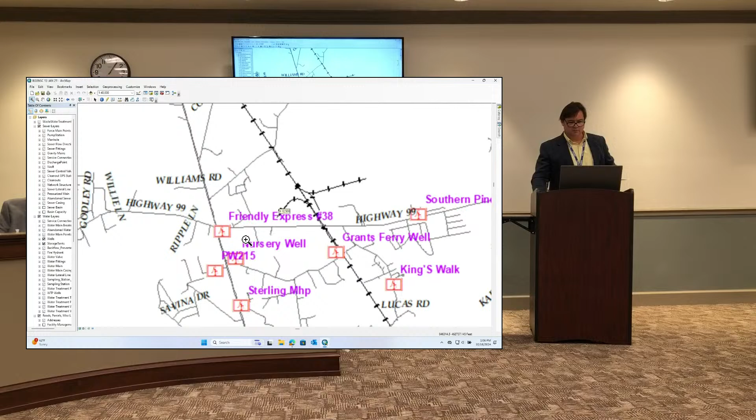As you can see, that water line jumps out of the State Route 99 right-of-way onto their property, goes across their property, then comes back out. That was to help us get around some existing utilities and also help speed along the installation process. Fun fact: Seaboard Construction was also our contractor that installed the water line for that.

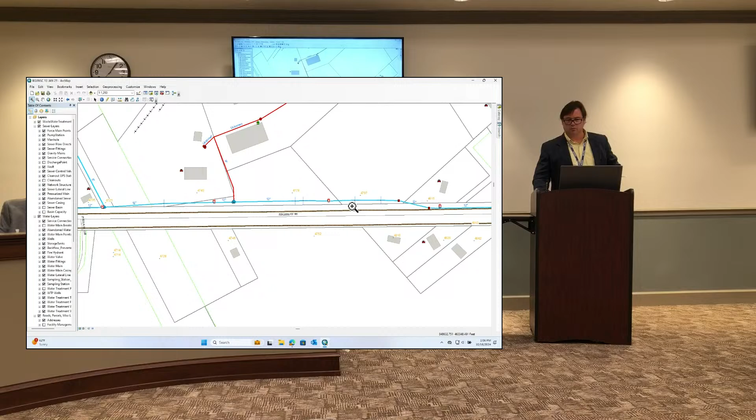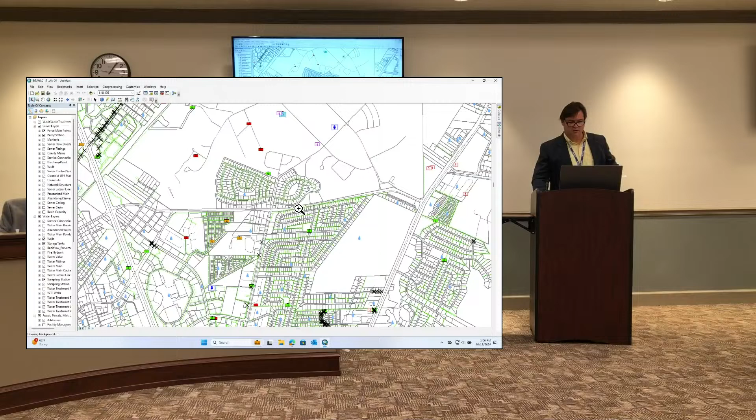Now let's take a look at Town Square, Chapel Crossing Road, over here just south of FLETC. FLETC's easy to see because it's the big blank spot. So Town Square Phase 1 is what we're talking about here, and that's these residential units, and this will round out the easements and dedications for the Town Square development.

It is Phase 1, but they've already dedicated Phase 2 and 3, correct? That's correct, yes. They got their phasing numbers out of whack a little bit, but this will be the last of the phases. This phase is right by the road, right? This is the townhouses, correct, that are running along there. That's correct, yes sir.

I'm happy to answer any questions if there's anything in particular about these two items.

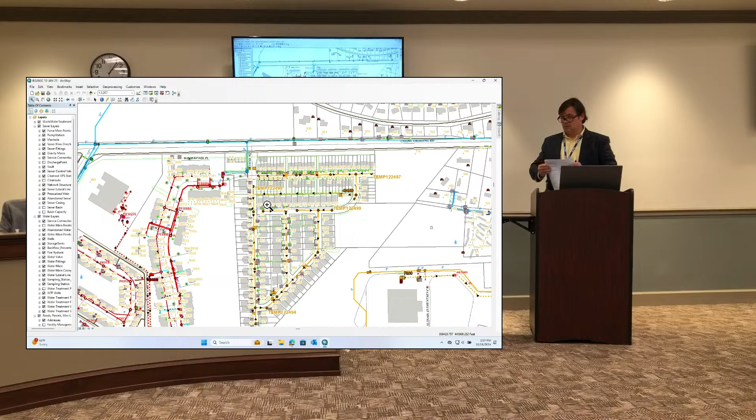Have a motion? I move that the Facilities Committee recommend the full commission approve and accept these projects with associated documentation. I'll second the motion. Motion second. Any questions? Hearing none, all in favor? Motion carries 3-0. Thank you. Thank you, Commissioners.

Go to the discussion section of the meeting. First item is lead service line inventory dashboard.

Mr. Burrows? Yes sir. This is probably the most noteworthy thing that's happened in our industry this week—everybody's lead service line inventory is due today. Ours was submitted earlier this week, so we're on schedule.

According to EPA regulations, we are required to identify the materials of service, both on our side and the customer side of the meter, for water only. There are multiple categories, but essentially we'll talk about 3 of them today: lead, known not lead, and unknown. There's also another category for galvanized requiring replacement.

However, to our knowledge, we will have none of those in our system. The galvanized requiring replacement are any galvanized service lines that are downstream of lead mains. We have zero lead mains in our system, so we don't have any galvanized requiring replacement.

So essentially what we have is 2 classifications. There's a 3rd classification which we don't have any identified at this point. We have known not lead, and unknown.

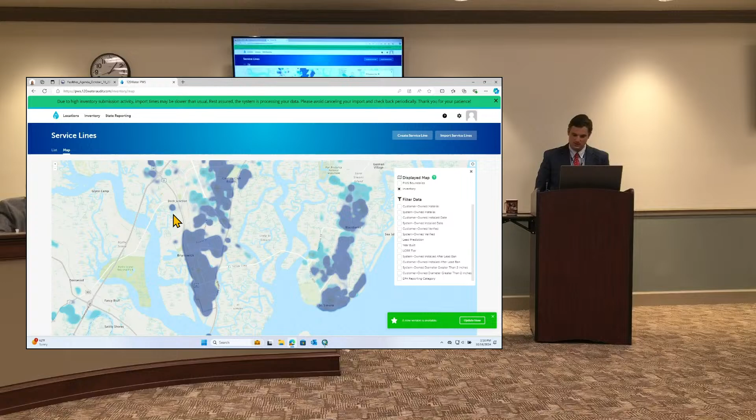So the dark blues that we have here are unknowns at this time, and we have a few things we're required to do. We are required to notify new customers of what their material of construction is when they come in and sign up with us. We won't necessarily tell you that it's PVC, but we'll tell you whether it's not lead or unknown.

We'll have to send out letters within the next 30 days, so theoretically maybe the first week in November or so, we'll send out letters to everybody. Every customer will get a letter identifying what their service is, either unknown or known not lead.

And I say that because we have no knowledge of any lead service lines in our system, but we don't have records on what everything is. So until we can officially eliminate all of them, we cannot say they're not lead.

But our water distribution crews, Derek and Alvin, have been here. Derek's been here 20 years. Alvin's been here 16 or 17 years, something like that. They have never seen a lead service line in our system, but they obviously haven't laid their hands on 32,000 services. They probably laid their hands on most of them, but they haven't laid their hands on all 32,000.

We have a lot of galvanized lines. We have what are known as lead goosenecks, which are excluded from this if they're shorter than 24 inches. We have a lot of lead goosenecks shorter than 24 inches, and if we expose those, we are required to immediately change that gooseneck out.

And so those will be done heavily with the galvanized project. That's how we're going to do those, because we're going to go in and run a new main and run the new services. Those goosenecks will come out at that time.

Everybody will get a letter in the mail from us, and some people are going to get 2 letters. The reason for that is we have to send one to the customer and one to the owner of the property. For some people that's the same, but they have different names. So one of them the owner may be an LLC, and the customer is Joe Smith. Not knowing all of those things, you may get 2 copies of the same letter.

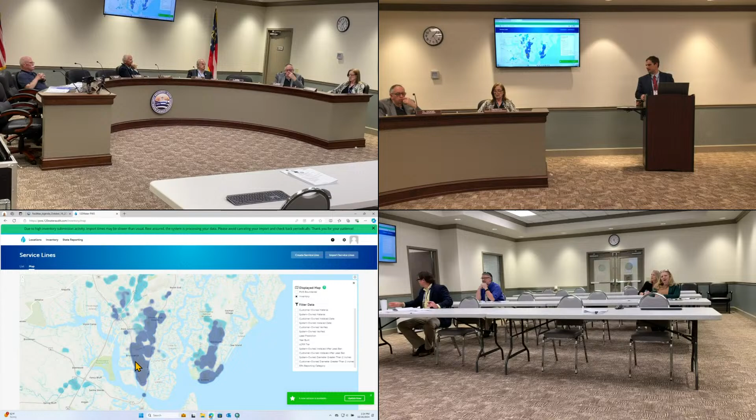You kind of look at this sort of heat map here. Yeah, it's the older stuff in downtown Brunswick, the south end of St. Simons. It's been in the ground for 50 years that we're going to have to go check all these.

I got a question. Can we, when we're at the meter, can we identify the kind of material? You can right there, but that doesn't mean it couldn't have changed past it. Okay, so ground radar won't work? Can't tell material type. Can't confirm material type. They'll have different materials. According to the EPD, you cannot confirm material type that way.

Requirements? Do you know what your line is? That's what we're going to do. On the first letter you're going to get, there's two forms of letter. One of them will say yours is known, not lead, and you have nothing to do. If it says unknown, there'll be a postcard in there that says, do you know the material of your service line? And it will have a few option checkboxes.

We're not going to ask you to dig down. If you want to dig down, then by all means dig down on your own side. We're not going to require anybody to go dig down on anything. Check that box, it's a postcard, postage paid, everything. Send it back to us and we'll input it in the system.

How many responses do you think we'll get back? I think we'll get a few hundred. I don't think we're going to get 17,000. Say 1 to 2%. Yeah, a few hundred maybe.

The purpose, honestly, of doing this in this meeting today is to try to get ahead of some concerns. Just because we send you a note that says you have an unknown line does not mean you have a lead service line. And furthermore, even if you have a lead service line, that does not mean that your water is in any way unsafe to drink. This is just the requirements we're required to follow.

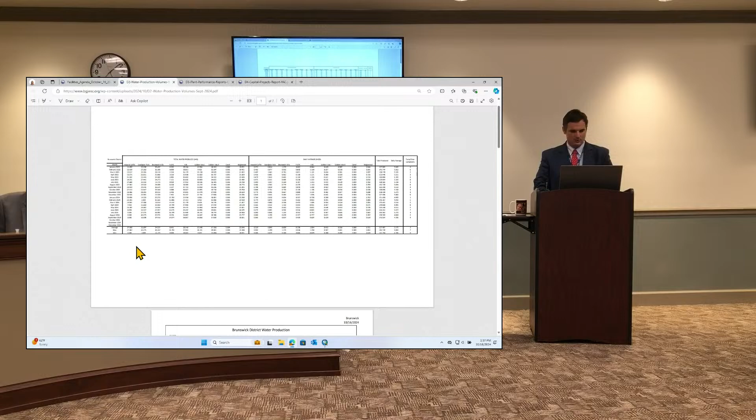The Brunswick system produced 4.8 million gallons a day. Mostly balanced pretty well — you'll see an increased water flow at Goodyear Park as a result of Howard Coffin being down, but overall that's pretty well balanced. It flows a little lower than what we saw last year at this time. Hopefully that's because, through the leak notification or continuous usage notification, we've eliminated some long-standing leaks that were using a lot of water. We still send out a few hundred of those notifications every month, but we're seeing some good results on that. You can kind of see when it was dry in June and early July, water usage went up a little bit. Now we're back down towards the winter averages, as wet as it's been.

On St. Simons, all 4 wells were up and running for the month. Mallory got a little bit of a late start on the month due to some electrical issues, but we had 2.5 million gallons a day of water on St. Simons for the month.

Obviously, these water usage numbers do also reflect water usage during Hurricane Helene. Our water systems were up during Hurricane Helene, but water usage was down because of lack of power and some people leaving and getting out of town. That was just for 5 days or so, but that can have an impact.

You can kind of see again, June when it was really dry, likely outdoor water usage on St. Simons, now it's coming back down. We do see a lot of that, and that trend tends to follow the rainfall events.

And then at exit 29, the wells system's really balanced down there. About 360,000 gallons a day coming out of the exit 29 system between those 2 wells down there.

So water systems continue to be very effective. We've got some ongoing work we're doing to rehab some generators on those well sites, but thankfully we were able to maintain the water systems during the storm, and everybody had water despite the fact that power was out throughout 95% of Glynn County, something in that neighborhood. So good job by our water crews.

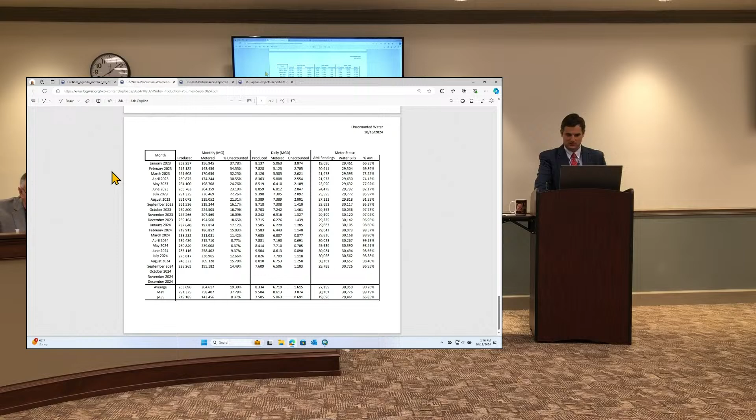Any questions on the water report?

Okay, go on to wastewater. Wastewater reports, Academy Creek for the month, 12.4 million gallons a day, which is down a little bit from August. The first 2 weeks of September were extraordinarily wet, and the numbers did drop back into closer to normal territory by the end of the month.

But we had some heavy rainfall the early part of the month, and still, with the amount of rain we got in August and September, it just takes a long time for those flows to go back down. And you can see right here on these numbers on the influent concentrations, it does have an impact on the strength of the material coming in.

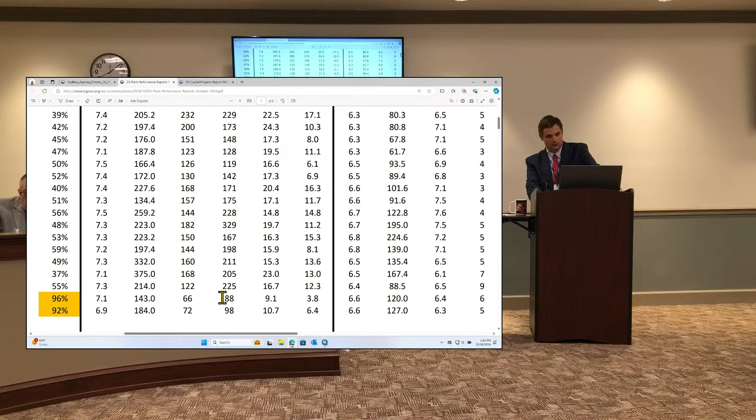BOD at 72 parts coming in, normal domestic wastewater is about 200 to 250 parts per million. So you can kind of get a gauge of how much rainwater is included in those totals to drop it down that far. About 100 parts per million on the TSS. Did get our enterococci under control.

Glad to see the plant take that under control there. Ammonia still having some issues there. We're getting some more RAS pumps online. Hopefully that continues to decrease.

We will begin November 1st cleaning out the grit in Aeration Basin 3, like we did in Aeration Basin 2 earlier this year. The one advantage we have for Aeration Basin 3 is it doesn't have 40 years of grit in it, because the basin hasn't been there for 40 years. So it should be less grit. But it has never been cleaned out, like Aeration Basin 2 had never been cleaned out. So we'll get that process started November 1st.

For the month, 12 inches of rain, following 14 inches of rain in the month of August. So our excessive rainfall certainly looks like October may be a little bit drier for us, which is a welcome sight for our sewer crews. But if you look on our graph on the next page, you can obviously see the rainfall-induced I&I being a major concern that we're going to have to focus on coming up in these next couple of years, try to get these numbers knocked back down where they need to be.

Dunbar Creek for the month, 4.4 million gallons a day leaving the facility. That is a violation, as 4.0 is our permit limit. Those numbers we're back under 4 the last couple of weeks of the month and have been under 4 so far this month, but that is heavily rainfall driven. As you can see, the few months before that were 2.9, 3.2. So obviously we did not add 1 million gallons a day worth of actual sewer flows to our facilities.

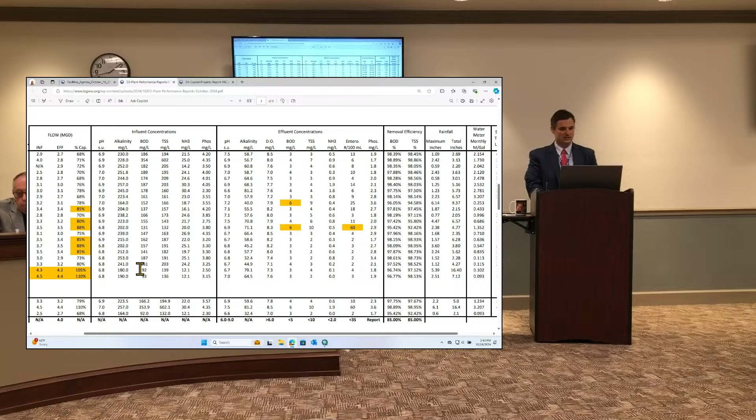It was not 0 ammonia leaving the plant, it was 0.04, but it does round to 0, so that's always a nice number to see on anything leaving the facility. 97% BOD and 98.5% TSS removal, which is really good considering these numbers coming in are not high to start with. If that was up in the 150 to 200 range, you'd be looking at 99% removal on BOD and TSS.

For the month, the rain gauge on the island showed about 7 inches of rain. Rain gauges are as good as they are - it's a point location, you're not getting the full spectrum on that. But obviously still another very wet month, particularly those first couple of weeks of the month on St. Simon's.

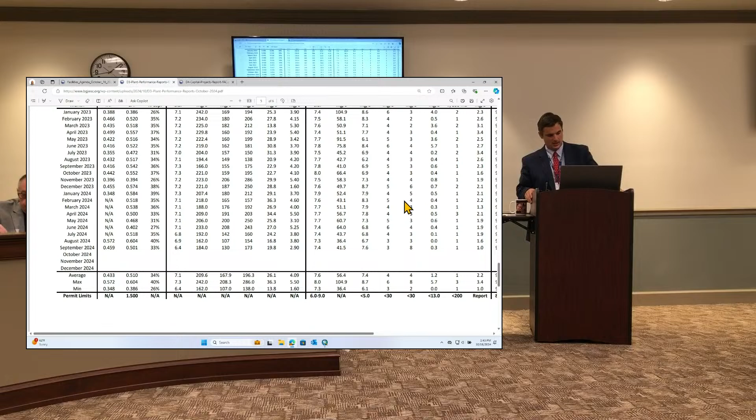Then at exit 29, about 500,000 gallons a day going through. That system being newer has significantly less I&I compared to the other 2 systems. We do get a little bit in there, but not near as bad as the others. So you see the concentrations higher than the other 2 plants on the influent coming in, but 98% removal on BOD and 95% for TSS. Plant ticking along very, very well down there at exit 29.

About 7.5 inches of rain recorded at exit 29 for the month as well - you can kind of see it. Exit 29 flows stay fairly consistent month to month compared to if you look at the graphs on the other ones.

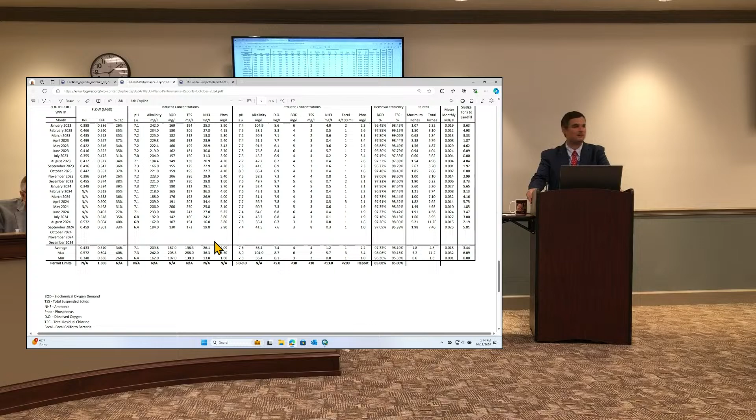Thankfully, we did not receive much rain with Helene. That would have made that situation drastically worse for us if we had gotten a substantial amount of rainfall during that event, given the amount of power outages that we had. But any questions on the wastewater flow report?

Question: the replacing on the north end or south end of Brunswick, is that where most of the water is coming from? We know we have extremely high run times at Pump Station 4002, which is the one that serves the bulk of the south of Gloucester district in Brunswick.

We do have the 5 miles of pipe that are currently under rehab. They're doing some pre-inspection stuff there now - when the project report comes up, we'll go through it in more detail. We know that is a major contributor.

We also have significant I&I issues out around the hospital and out in the Riverside district across 17. We have significant I&I over there in the mainland district, and then on the island, it does appear that a large amount of that I&I is getting into the gravity basin immediately surrounding Dunbar Creek, because we do have some elevated run times at pump stations, but nothing that would indicate the volumes of flow that we should be getting.

So we've got some south end of St. Simon's work to do in the 2002, 2003 basins. Those are large basins on the south end, but it looks like the bulk of that is getting into that gravity basin immediately adjacent to the plant, which makes a certain amount of sense given how low it is back there in Glen Haven in those areas.

And if we get a lot of tidal issues in those situations, we could get a significant amount of water through that plant. We've got 4002 going now, and I got the information sent to me end of last week on the 4017 basin, which is the one that serves the hospital area - haven't had a chance to review it yet. So in the next year or so, you'll probably see several more CIPP projects coming out to try to address this.

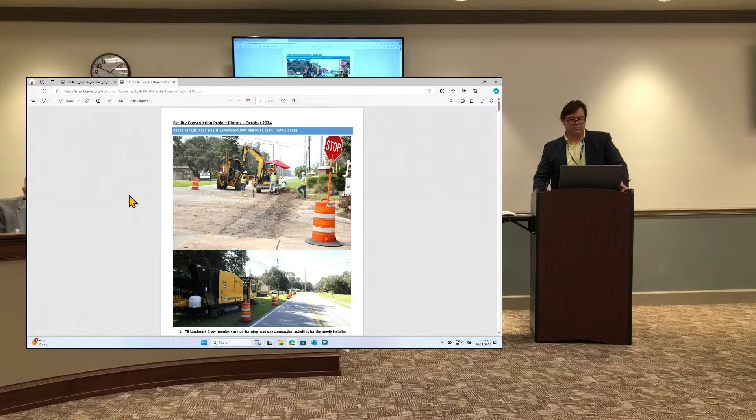Commissioners, here's our construction underway photos, and we'll walk through this pretty quickly. Pump station 4105, 4107 basin improvements, that's primarily a force main extension or improvement project. Going very well. I think they're using the last couple segments of poly pipe at Old Jesup and Cate Road for the carrier pipe that's going to go underneath the railroad tracks, and we're just waiting on the final permitting with the railroad companies, two of them, RailPros, which is their preferred contractor for us to use for flagging once we start drilling underneath the railroad tracks. So going very well. TB Landmark is our contractor for that project.

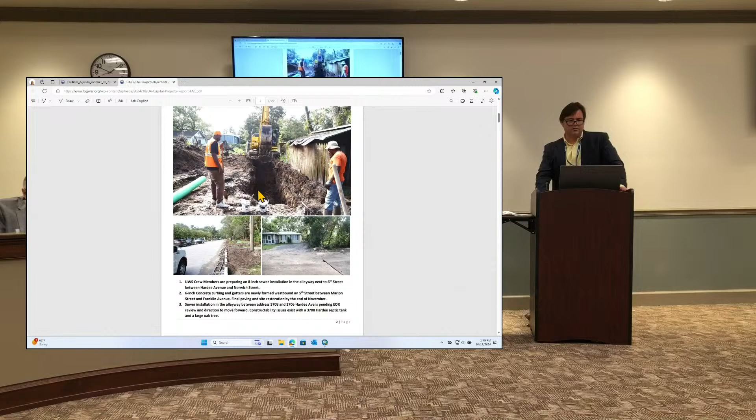Next project is ARCO area water sewer extensions. We're hoping that project wraps up in November with final paving and whatnot. Last bits of the gravity, some pictures here of it going in. This is a good example of one of the unopened alleyways we're utilizing to stay out of the roads. We did relocate some of the originally designed gravity segments in the roadways at the contractor's advisement, using these unopened alleys. I believe the report last Friday was there's about 750 feet of pipe left to install.

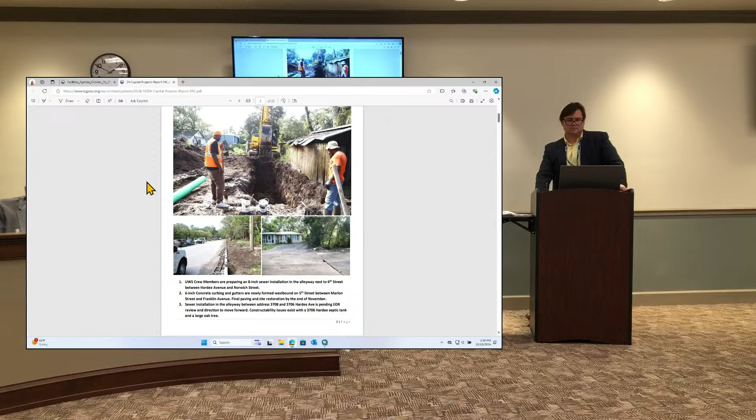It's just testing and site restoration, paving, things like that that's got to be done. That's it. Closing in hopefully very soon on that.

Galvanized replacements, in-house project, just a couple shots here of segments of pipe that have come out of the system. Ms. Annette Corneli, she's in planning construction. Also Mr. Willie Walker, he's in planning construction as well. Showcasing a couple of those pieces right there.

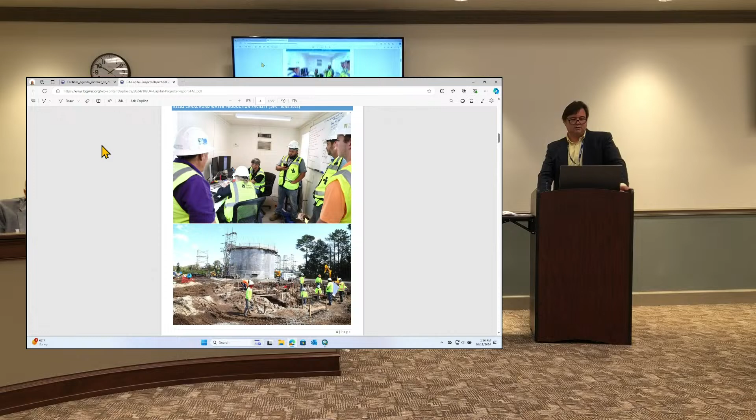Canal Road Water Production Facility. If you haven't been out in that area, I encourage you to go take a look. You'll see the big inside, the inner wall of the tank that's standing out there now. They'll be winding that with pre-stressed wire, then shooting the outer concrete wall on that. Looking pretty good. A lot of site piping all the way underneath the building of the service pumps going in now.

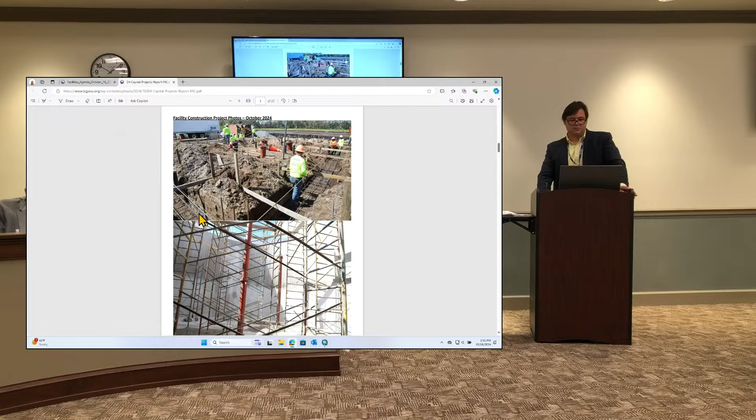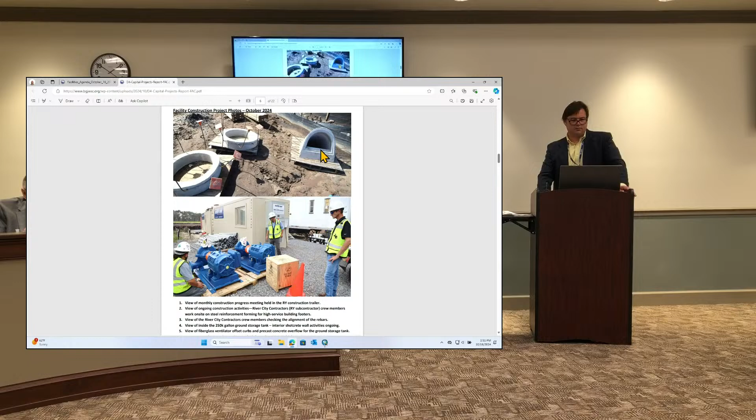That's the inside of a ground storage tank if you've never seen one, before they've shotcreted it. Some of the fixtures they fix on there, the overflow shroud. Two nice heavy-duty Peerless pumps sitting on skids there. Those will go into service, 1500 GPM high service pumps. That's what pumps the water from the ground storage tank to the system.

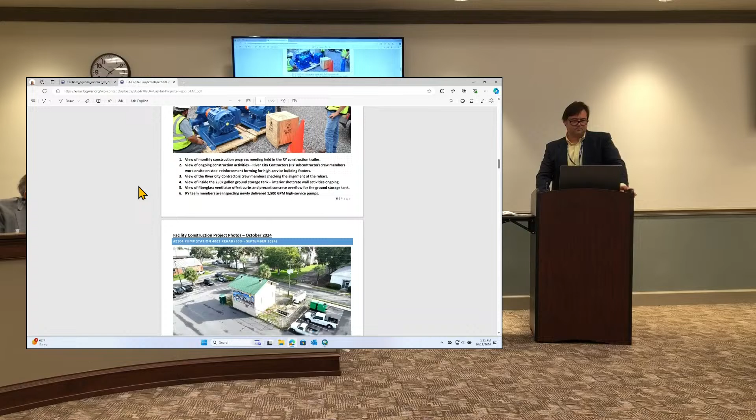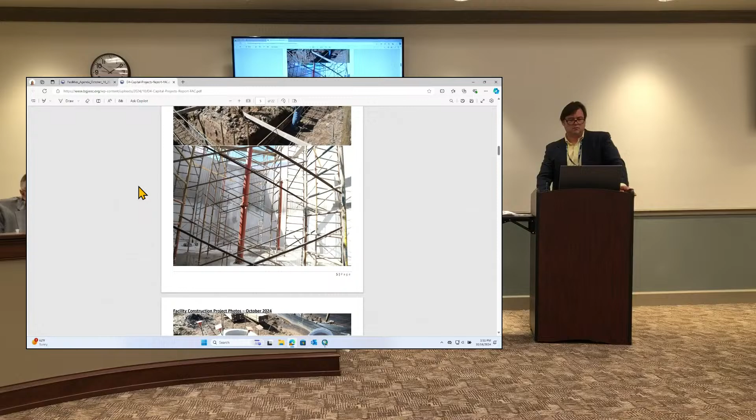Capacity of that tank that's being built, that one's a 250, I believe, it's either 250 or 300. 300, yeah, 250 to 300, it's what we could fit on the site. We did obtain, or are in the process of obtaining, the adjacent parcel from Glynn County. That is in the works, but to meet setbacks and requirements, that's about as big as we can go. We're also limited on the height of the tank because of the closeness to the airport approach.

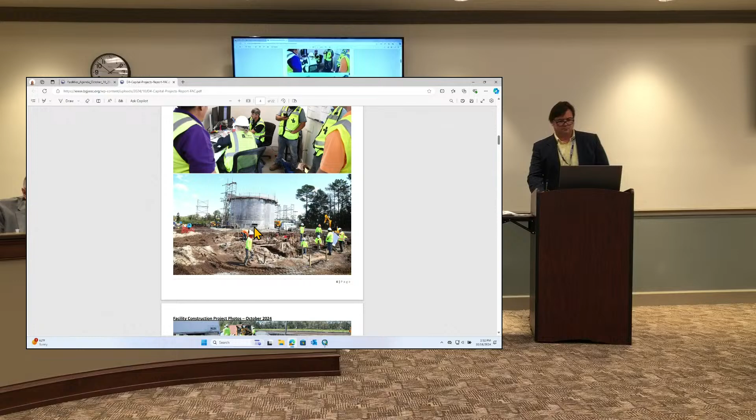Reeves Young, our contractor on there.

Pump station rehab. This is the group of 4001, 4002, and 3101 down on the south end. And this is the picture of 4002, downtown Brunswick, right off of Mansfield Street, adjacent to Mansfield Street.

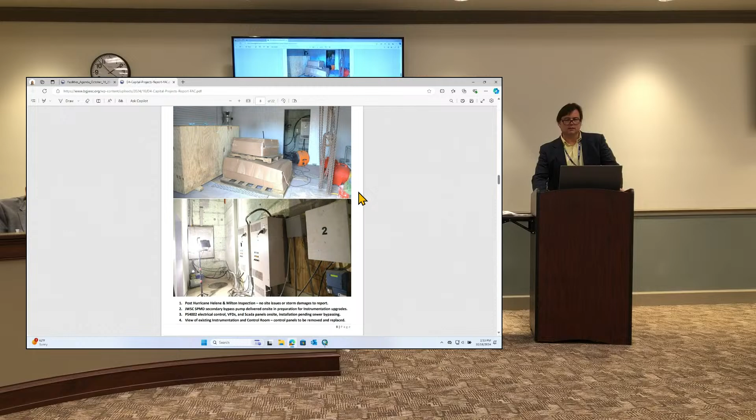Right now we're currently waiting on part of the agreement to control costs on this project. Joint Water is doing the bypassing, providing bypassing for the station. That station has to go under bypass once our contractor goes in and starts replacing the electrical components, motor control units, etc. inside there. All the electrical components are on site now, safely housed inside. You can see they've done the interior of the pump station, looks really nice. It's in good shape, been all repainted and rehabbed. The motor control electrical room is going to be air conditioned now to take care of those VFDs, and we're just waiting on our ops folks to get out there and get the bypass hooked up so Popco can proceed with the electrical replacements.

How much land do we own around that pump station? We don't, just the fenced-in area. Yes sir, so it's not a whole lot. We were going to approach the city about obtaining a little bit more of a footprint, but right now it's just what you see literally within the fence there. It's not a lot of room. Actually, I'm not sure that one's been deeded over yet, so we may not actually own that property. City's got it right now. When we go to that, maybe we'll ask for a little bit more.

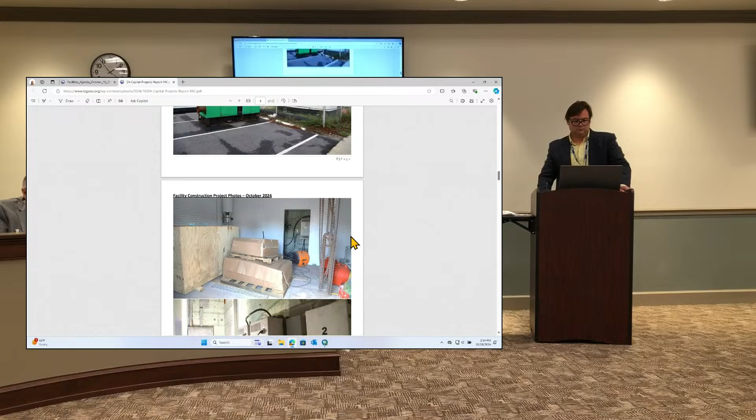You can see the bypass sitting out there right now. That has a permanent bypass, and the green one is a rented bypass as a backup, which obviously is not piped in yet. So we have a permanent bypass pump at that station? Yes sir. Although I will say, during the hurricane, that is one of only four stations that I know that didn't lose power. So we had a permanent bypass there, but it never had to run because that was one of the mythical four that didn't lose power.

So, taking the umbrella to work. It didn't rain. Yeah.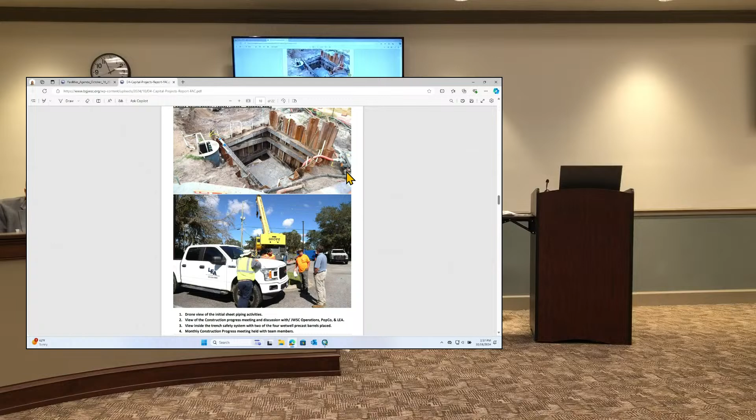That's one of the site meetings there with our contractor, engineer, and joint water staff.

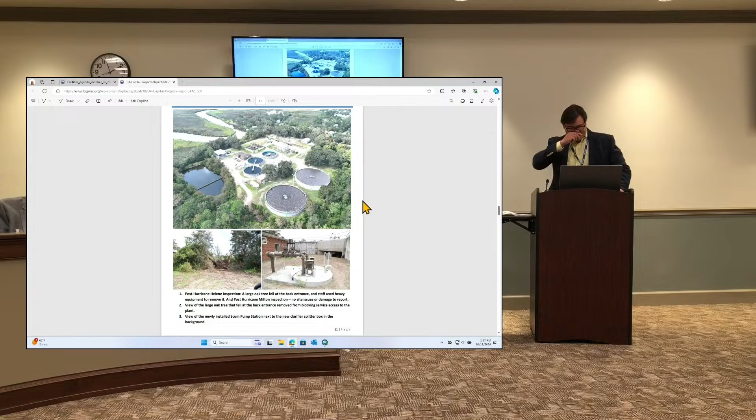Dunbar Creek - the project has gone very well. We've got a couple more items to address. We are looking at some roadway improvements we talked about last month, and they're getting us finalized quotes on that. I do not believe there will be any price changes associated with potentially rerouting some of the paving there.

We're also going to be installing an alum and liquid lime feed system for phosphorus removal, and there will be a change associated with that, but that'll be coming to you in the next couple of months.

On that bottom left picture, you can see there was a large tree that lost its roots and fell over the back entrance during the hurricane. We had that removed the day after Hurricane Helene came through. Internal crews took advantage of that - our facilities maintenance crews and a couple of our water distribution crew members took care of that one so they could access the back entrance to the plant.

That plant was on generator for about 3 days following the storm before they were able to restore power to that area, but everything went very smoothly.

The new clarifier is online. It was taken offline briefly because it was leaking into the weir troughs before it went over the weirs. We got that taken care of and it's back online now. All of the other change order items we've done for the air piping and the roofing and things like that have been completed.

Is there a priority system for Georgia Power on restoring power in terms of need? They have our list of priority assets, yes sir. I think in this scenario, it was what they could get back up as fast as they could because of having to rebuild the transmission lines. So it was more about what was available at the time. Having to rebuild all those transmission lines, some things that weren't fed from those main lines were able to get pulled up quicker than others.

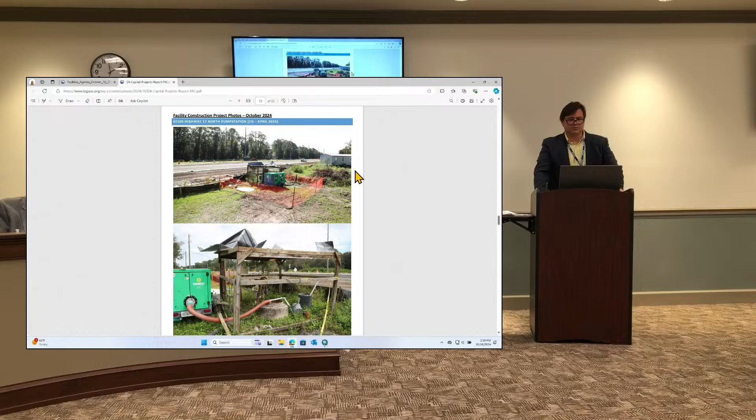Next project is Highway 17 North Pump Station, and that's a shot of that there. It only sustained a little bit of minor wind damage during the hurricane to our existing pump station structure. And the contractor's already putting dibs in on reutilizing that as a chicken coop after the project - they helped us with the demo process.

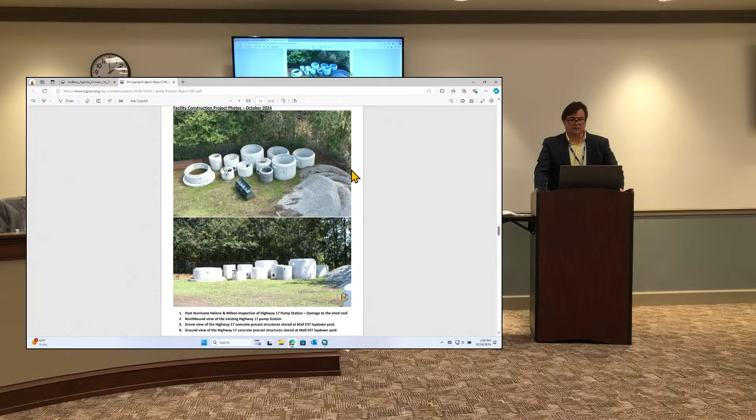So it is under bypass, and that group of customers is being taken care of. Again, there's the structures back there at the mall tank site, sitting there ready to go.

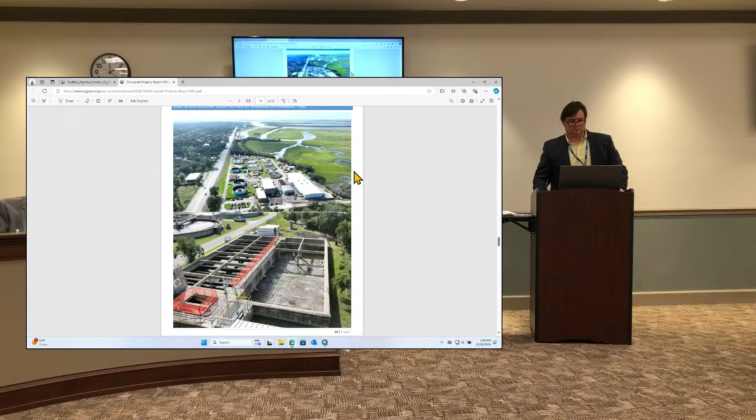Academy Creek - combined project to do some RAS replacements, which are sludge pumps, and the UV installation. You can see they've been focusing on demoing the chlorine contact chamber. On that bottom photo you get a good shot of what it used to look like on the left, and they've demoed most of those interior walls out.

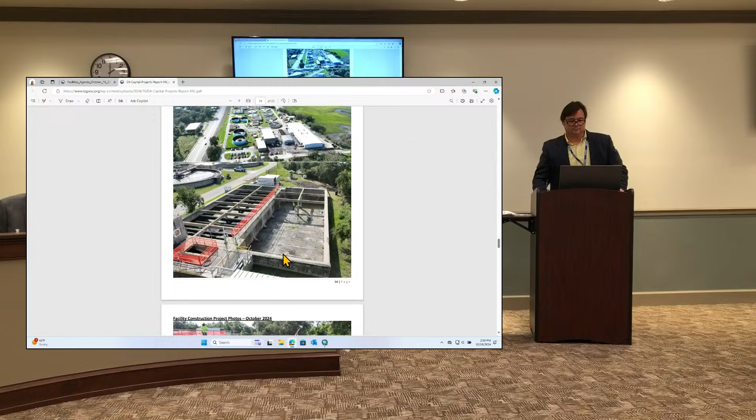Can you zoom in on the top one and put an arrow where the discharge is and where the work's being done? Right here - the work's being done on the west side of that.

So the flow goes out of there and out to the creek right there. Everything's going through the east side of the channel right now. That's not causing us any problems. The demo crews have been in there and that's going pretty smoothly.

They're also going to be working in the two RAS buildings in between the clarifiers on that set of 4 clarifiers - the white building in between the two clarifiers, and that other one that looks just like it. So they're replacing RAS pumps in there.

So the project is moving pretty well, obviously with the storms. They demobilized, had to remobilize. Haven't got a lot of work done the last couple of weeks, but they're back on site now getting work done.

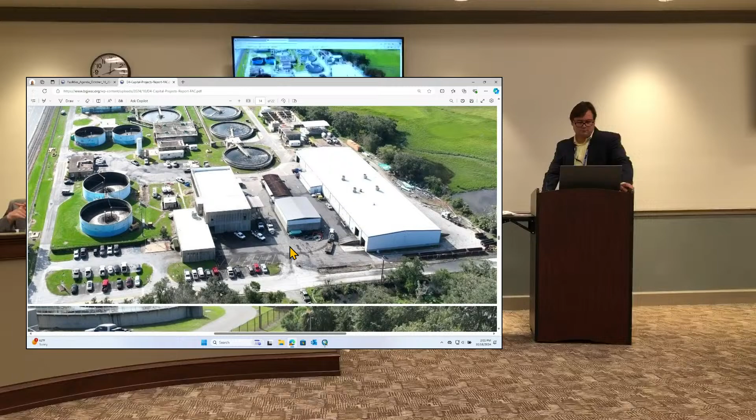Those tanks, you always know they're big, and then they demo all the interior walls, and you figure out how deep those things really are. So it's a good eye-opening experience for the operators to see it empty like that, with a person standing in there for scale, to show you what you're looking at.

Explain to us what type of equipment's going in here compared to what we did have.

Currently, we use gaseous chlorine to disinfect, so we inject gaseous chlorine into the front end of the contact chamber, and it makes its way through all of those channels to increase the contact time, and then we dose sodium thiosulfate for dechlorination on the back end. We're putting in UV disinfection, which is a bank of UV light bulbs fully submerged at all times that penetrates and sterilizes the bacteria, so we don't have to worry about dosing chlorine. The one advantage is you don't have to dechlorinate either—it just goes out as is.

The UV equipment was bought with an ARPA grant awarded by the state of Georgia, and we're having to pay for the installation out of our own pocket because the grant didn't cover all of that. But this will be a good project once we get done.

We're going to leave the existing chlorine side remaining in case there's ever a problem with the UV system—we could chlorinate in the short term until we could get that back online.

We're putting in another outfall line, a parallel outfall line, because at high tide and a 100-year flood event and max flow—it hasn't been realized yet, but calculations say that we'll have hydraulic problems at 100-year flood and max flow going through the facility. It would back up water to the point that it would cause problems for the UV system. With a parallel line that reduces the head, and you don't have that problem.

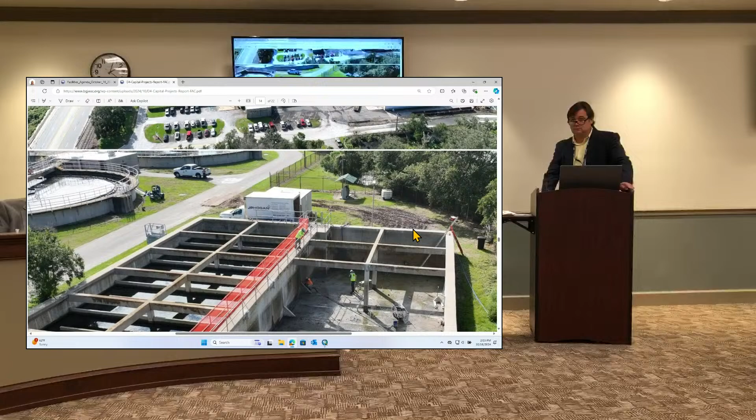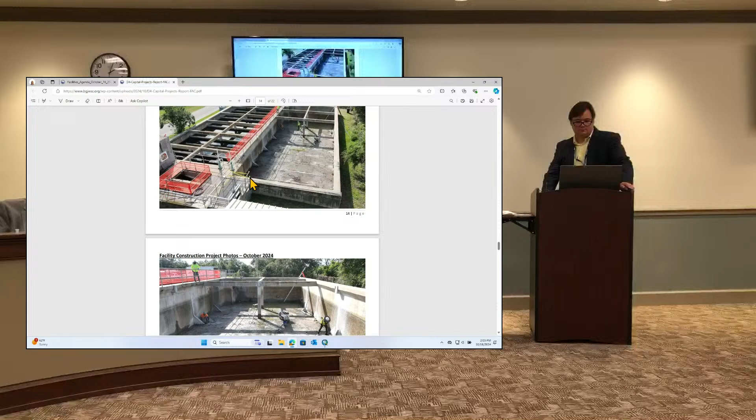Talk about the return sludge pumps as it relates to the ammonia problem we have. The reason we're having ammonia problems is because we have sludge that sits in the bottom of clarifiers, and we can't get the sludge out fast enough.

You can do two things with sludge: you can waste it, which means you put it in the digesters, or you can recycle it and send it back through the system. We do not have the ability to recycle enough sludge to keep that sludge level down where we need to, and if you waste it all, you don't have enough bacteria to actually do what you need to do biologically at the plant. So we're going to increase about 4-fold the capacity to recycle sludge through that plant, and they'll also have chopper capabilities, so any rags or anything currently clogging up pumps will get chopped up and sent back through the system, and they won't have to worry about declogging pumps.

The last thing you want in any wastewater plant is something not moving. Solids not moving is always a bad thing, so we're going to make sure they never stop moving.

Those pumps are supposed to be delivered sometime before the end of November, currently as scheduled. We're not buying those direct—they're part of the contract.

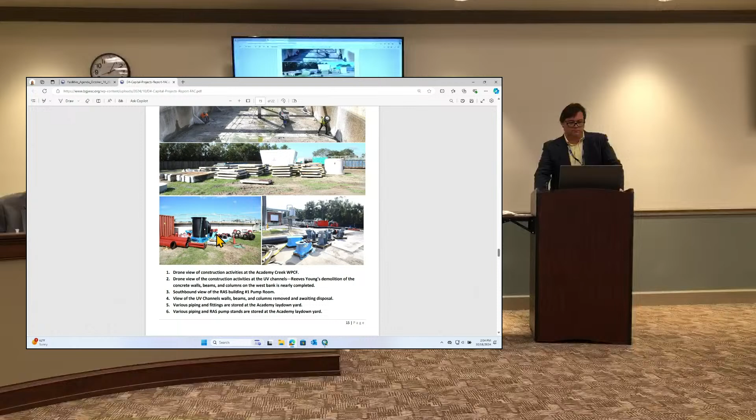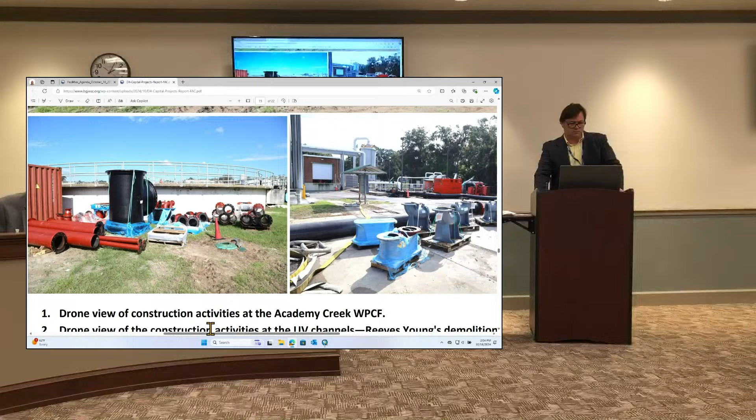See some large fittings there on the bottom. The largest fittings we ever buy are for Academy Creek. Most of the time in the system, I think the largest gravity line is a 48-inch—we've got some 52-inch pipe and stuff like that in the wastewater plant. That's a 48-inch fitting T right there, going from the clarifiers to the filter structure.

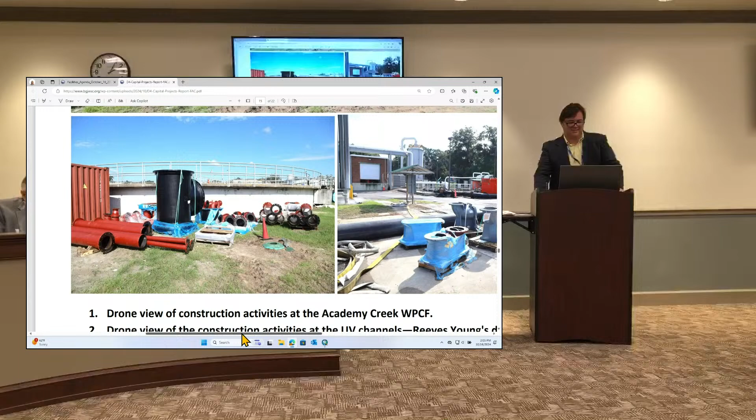If you'd like to see some large fittings you don't normally get to see, we have them at Academy Creek right now. We had some great pictures of Todd inside one of the pipes when the original Academy Creek project was going on—the 52-inch pipe that was going in. That was cool to see. Couldn't resist, huh? No, I couldn't resist.

Okay, Brunswick Villas water and sewer extensions, that's down on Townsend Street, just west of Altama, across from the college. If you drive down that way, you'll see the road closed and a bunch of equipment out there moving around, but that's where they're at, installing gravity sewer. Already got that well underway.

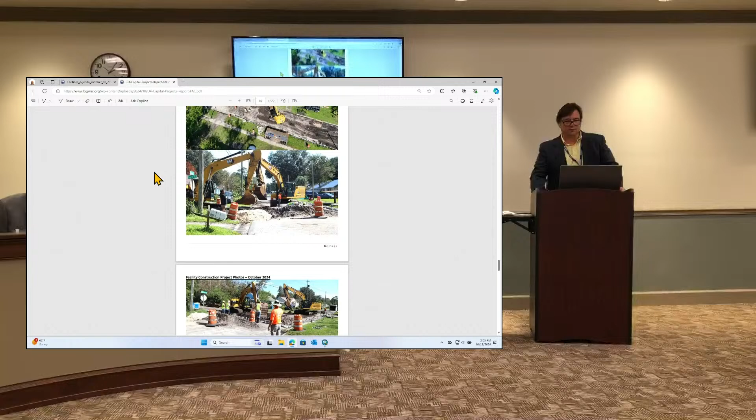We've already discovered some archaeological stuff out there, I say that jokingly. Let me clarify, an old manhole that was out there with an old force main connection, and a pretty brick manhole that they uncovered.

Is this lady supervising here? Yes. Okay, she's very interested, looks eager, like she's really into it. Yeah, and as I understand it, very eager to connect as well.

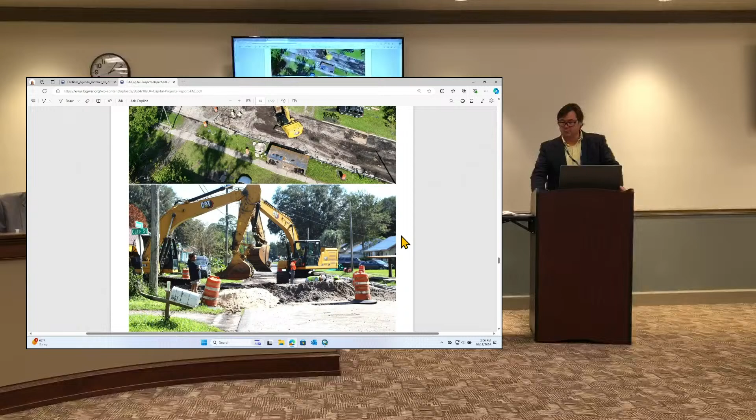I think a lot of the residents out there are very excited to see a good project going on in their neighborhood. It's going very well. They're coordinating a little bit with the adjacent ARCO folks on staging materials and whatnot, so we've got two contractors working very well together, side by side.

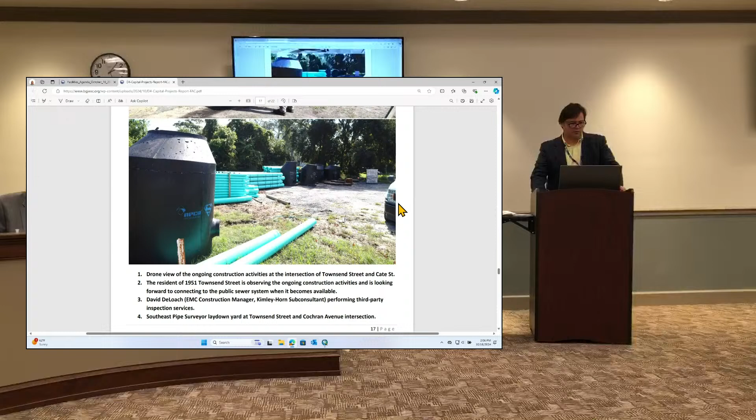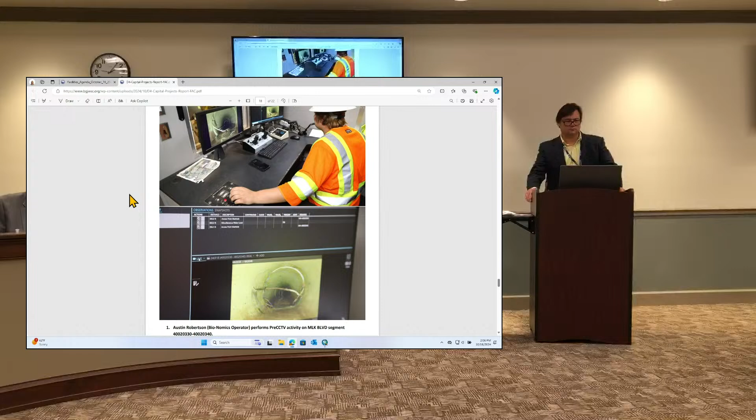Okay, and also speaking of the I&I on the south side down here, the 4002 CIPP is in progress. Before we do CIPP, we've already inspected all lines, but the contractor comes back through and re-cleans and inspects lines before they line them. Jason went out and rode with them for a bit and got pictures there of them inspecting a line that's obviously got some root intrusion issues.

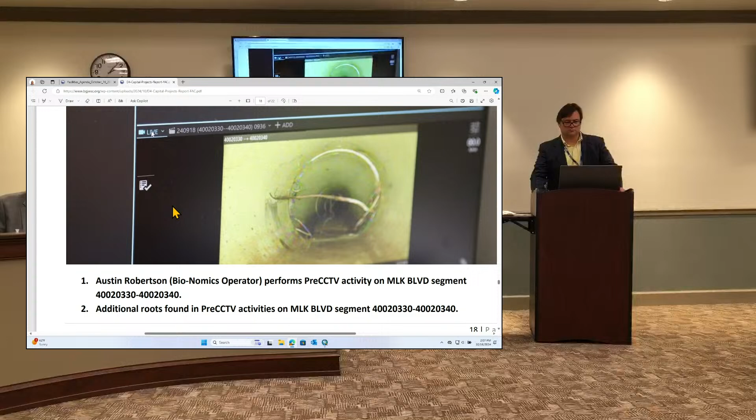As you can imagine, if a root gets through there, water will trail along that root, and that'll be additional I&I points coming into the system. They'll come through, cut those roots out, and then just line right over it, and you'll be good to go. No need to dig or anything like that, so that pipe will be real straightforward to line once they get the roots cut out of the way.

So we're going through pre-cleaning and televising that. They're having some issues getting hotel rooms the last couple of weeks because of the rush of hotels that have been taken up, but they'll be back in town next week, hopefully, to get back on doing that work.

There are a couple of challenging lines to do. We've got a couple out here on Gloucester Street that basically follow the center of the road, and that will require some traffic disruptions during that period. We're going to try to stage it where it minimizes that. Then there's a couple lines in between the Pate building and the old courthouse that have to be done, and we'll try to hit those on Saturday to avoid disrupting activities at the courthouse.

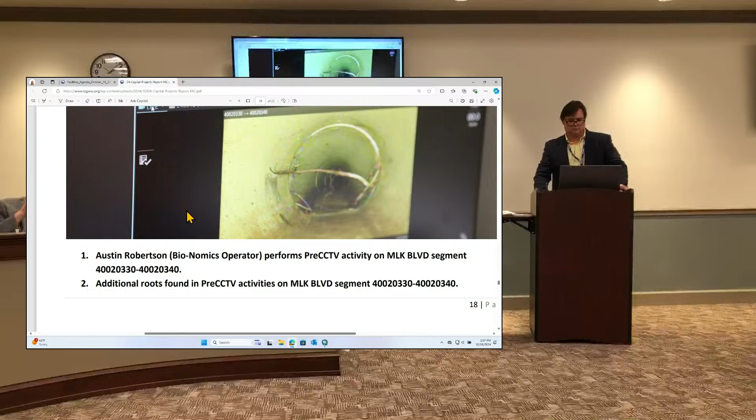Very good, so that's it for the pictures, and we're down to the details of the report. Glad to. We're getting very near bidding documents for the Exit 29 well and elevated storage tank, and very near bidding the community road project.

And community road, yeah, the community road is sewer, low pressure sewer for that area. And then we've provided final comments back for the installation of the eight fixed generators as well to our electrical engineer, and he's addressing those comments and finalizing the bid documents for that as well.

So a lot of work going on out in the community, but got some more coming up, and then we're still waiting on mobilization on the Exit 42 elevated storage tank as well. Going through some submittal review on that, electrical and painting, that we just received this week. Yep, we're looking forward to seeing them mobilized.